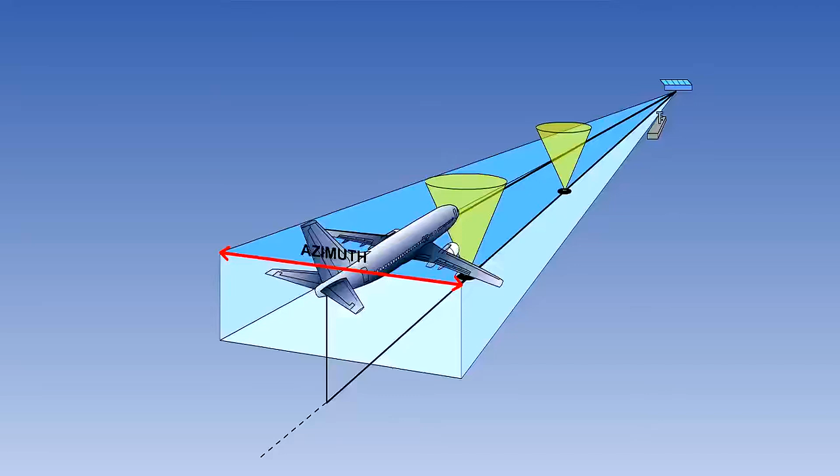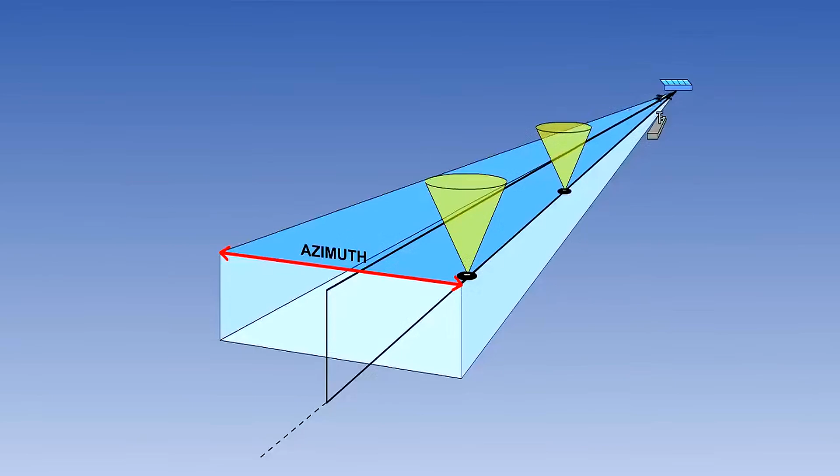The Instrument Landing System, or ILS, has been in existence since the 1960s, but it is still the most accurate approach and landing aid used regularly by airliners. However, GPS systems supplemented by ground equipment called Local Area Augmentation Systems are in advanced stages of research, and no doubt they will be available generally within 10 years.

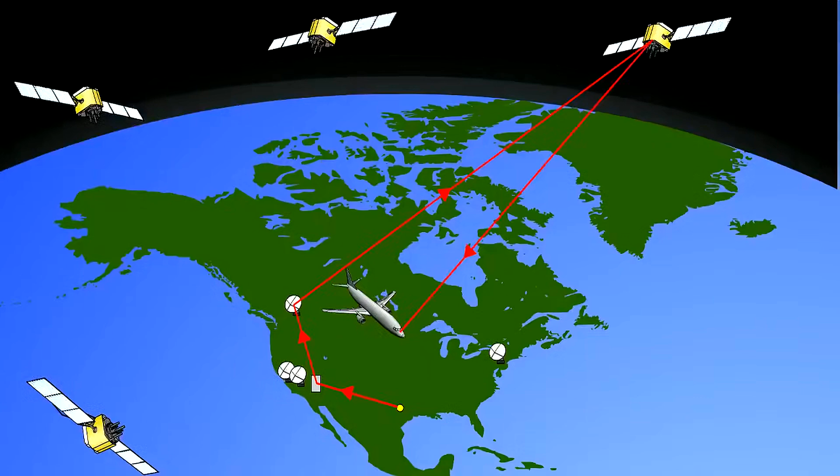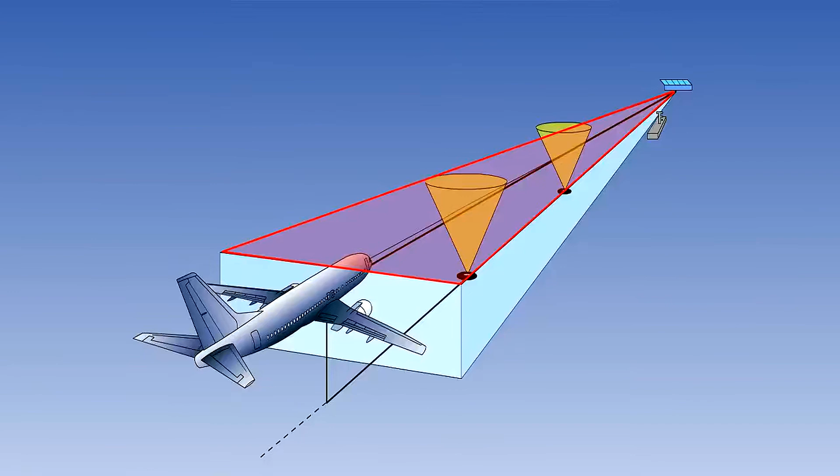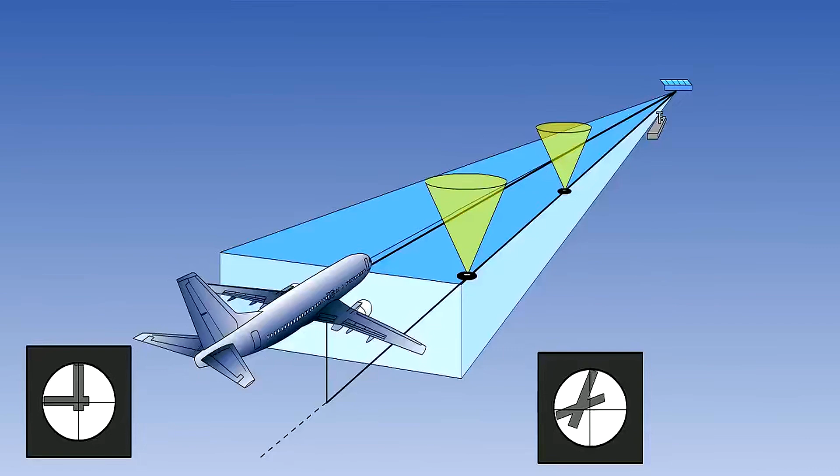In addition, microwave landing systems avoid many of the problems with ILS. But our concern in this lesson is the ILS, which provides pilots with an accurate means of carrying out a precision instrument approach to a runway, giving guidance both in the horizontal plane, azimuth, and in the vertical plane, the glide slope. The ILS provides the pilot with visual instructions in the cockpit to enable him to fly the aircraft down a predetermined glide slope and extended runway centerline, the localizer, to his decision height or decision altitude.

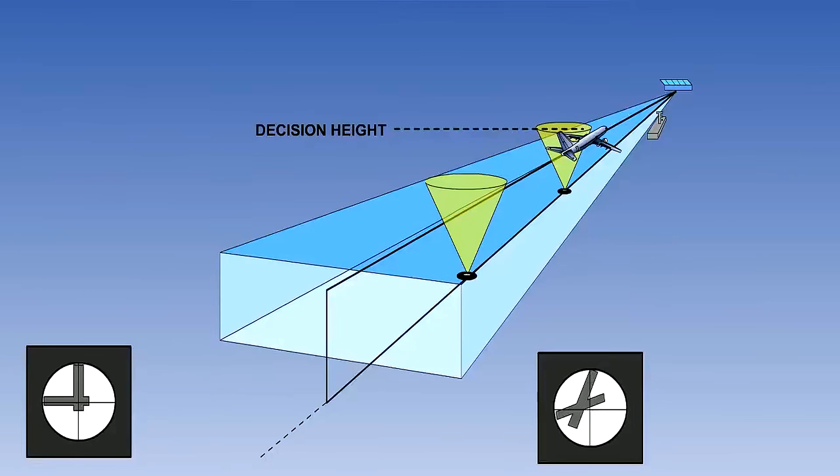At decision height or decision altitude, the pilot decides to land if he has the required visual references. If he does not, he goes around or overshoots and follows the published missed approach procedure.

There are 3 parts to the ground installation, the first of which is the localizer antenna. This transmits in the VHF band and is located on the extended centerline of the runway at the upwind end. That signal provides the extended centerline, the localizer, to the approach side of the runway.

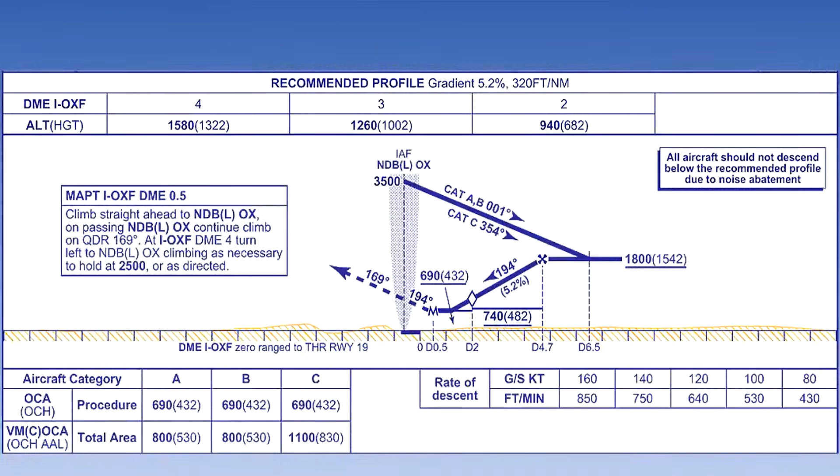The second part is the glide slope antenna, which transmits in the UHF range and is frequency paired with the localizer. It is located about 300 meters in from the threshold and about 120 meters from the runway edge, the touchdown point. It consists of 2 rectangular transmitters on a mast. It provides a descent plane at a predetermined angle to the horizontal, normally 3 degrees according to ICAO. When combined with the localizer, this provides a precise path to fly to the touchdown point.

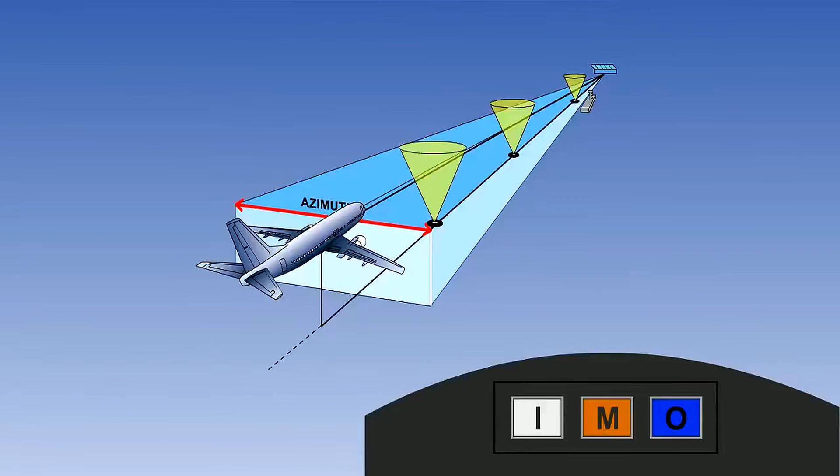The third element of the ILS is a series of 2 or 3 marker beacons on the approach side of the runway. They are designed to give the pilot a cross-check of height against range as he crosses over them during his approach. The distance is shown on the approach plate. Each beacon triggers a different colored light and audio signal in the cockpit as the aircraft passes over.

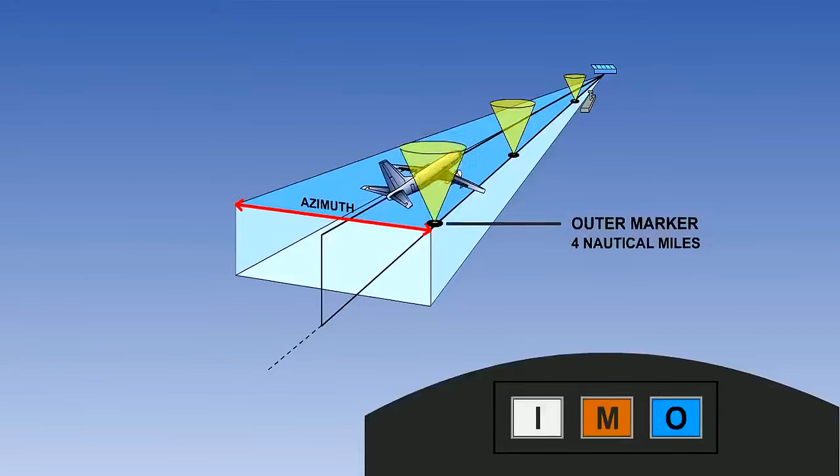The outer marker light is blue with 2 dashes per second and denotes a distance of between 11.1 to 6.5 kilometers from the touchdown point. The middle marker is amber, with alternate dots and dashes at the rate of 3 characters a second, and denotes a distance of about 1,050 meters. The inner marker is white, with 6 dots a second, and denotes between 450 and 75 meters.

Here we see the complete picture.

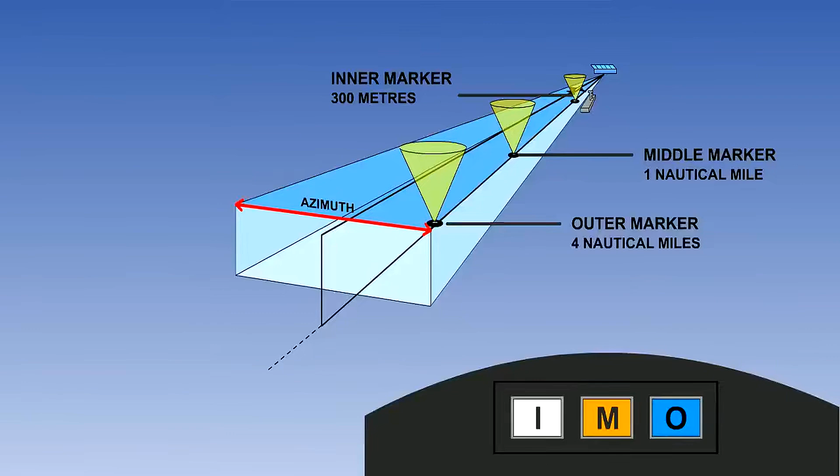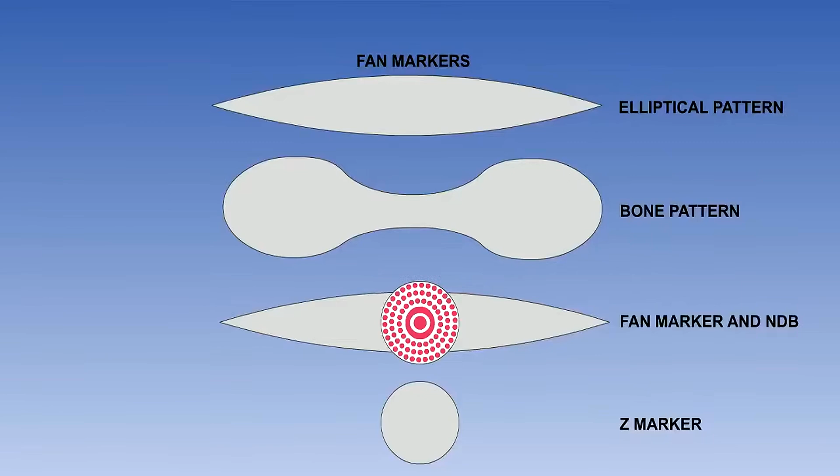Different patterns of transmission are emitted by the markers, but the pilot cannot tell the difference. They are not directional aids in any way and transmit at 75 MHz. They are generated by 400 Hz in the outer marker, 1300 Hz by the middle marker, and 3000 Hz by the inner marker. These beacons have frequently been replaced by distance measuring equipment, DME, which provides continuing distance readout for the pilot.

However, the DME is protected from interference only within the localizer's service area of 25 miles and up to 25,000 feet. When DME equipment is available, it is frequency paired with the localizer, with the DME distance being 0 reference to the threshold.

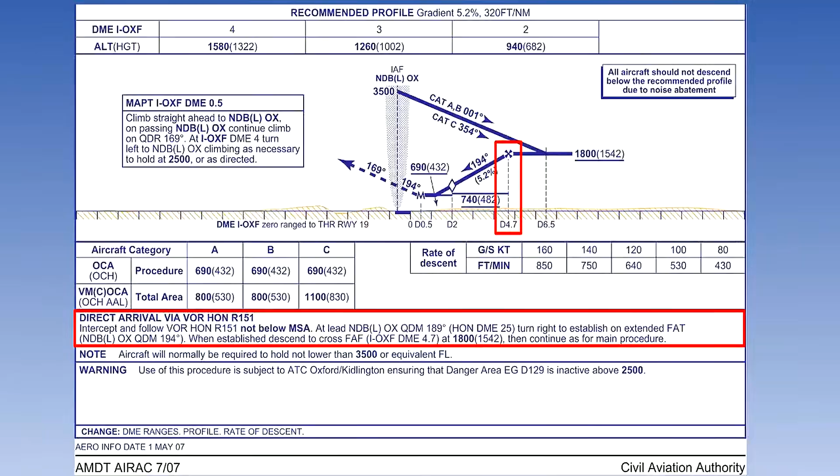It is also used as part of the published departure and arrival procedures, SIDs and STARs, to specify where a maneuver, such as a descent, is to start. The localizer operates in the VHF band, between 108.1 and

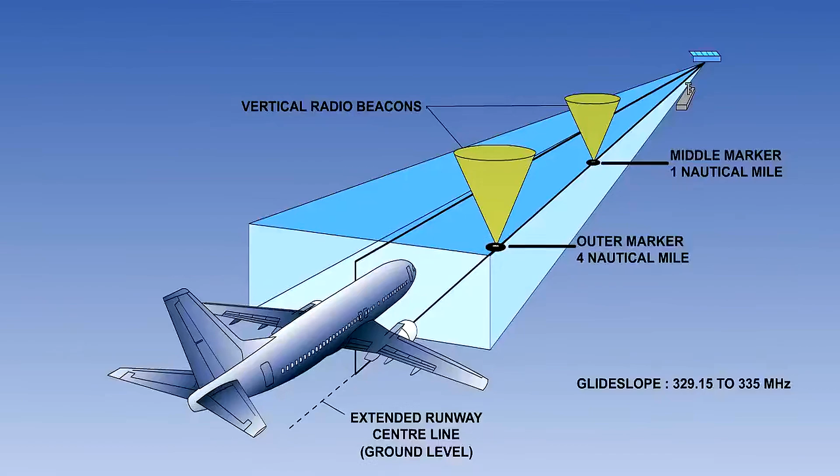Glide slope frequencies are in the UHF band between 329.15 and 335 MHz, also providing 40 channels which are paired with the localizer. This means that the pilot only has to tune to the localizer frequency to also get the glide slope transmission. This saves work and avoids errors. The DME transmission is also frequency paired with the localizer.

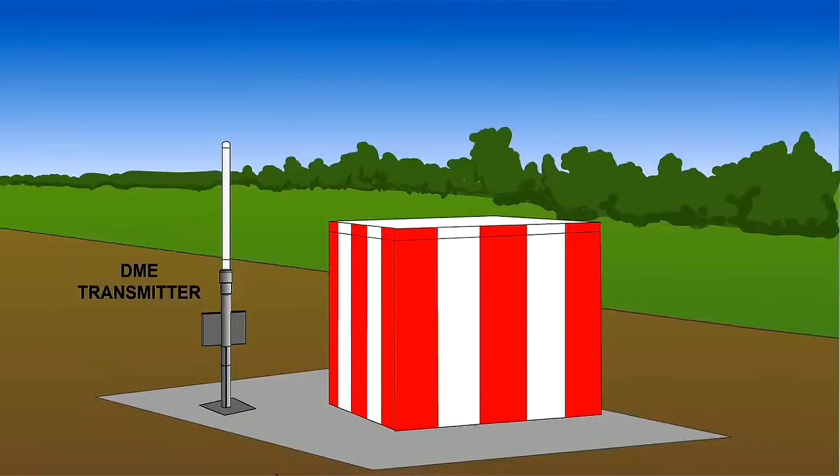The ILS must be identified before use. The ident on the localizer transmission is a 2 or 3-letter group, transmitted at 7 groups a minute, prefixed by the letter I, such as IOXF for Oxford ILS.

Airfields with an ILS are shown on charts and plates with a long paper dart-shaped symbol, and the frequency is shown. Here we see Oxford ILS on 108.35 MHz.

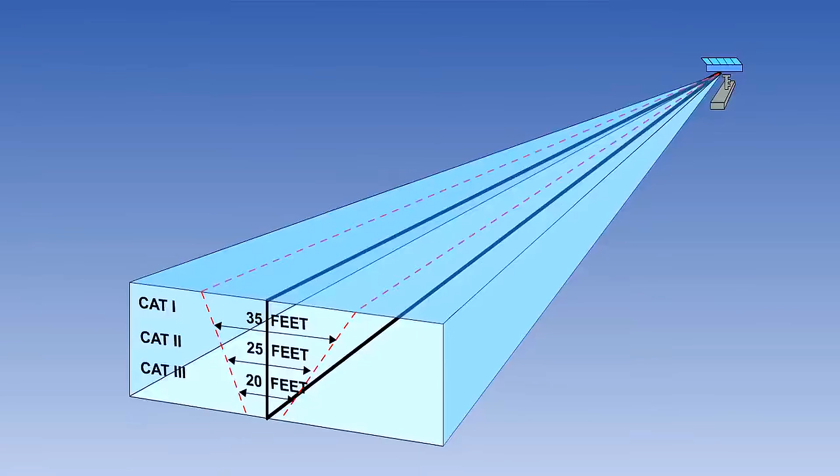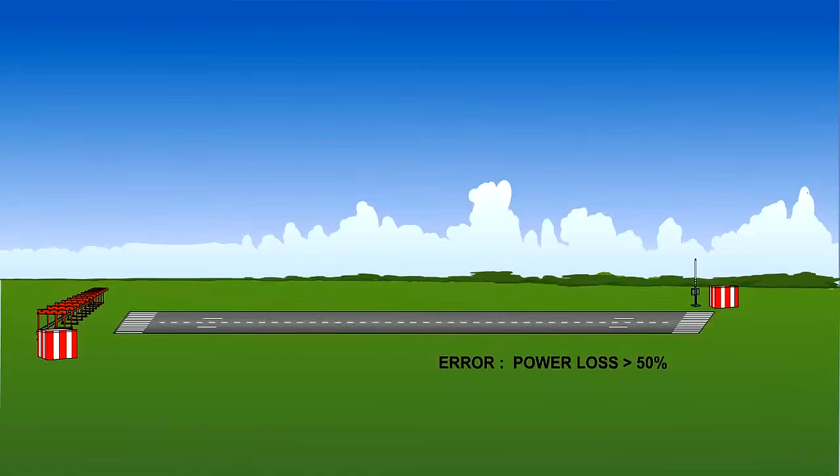If the ILS becomes unserviceable, the ident is withdrawn. If it is undergoing maintenance or testing, the ident will be withdrawn or replaced by a continuous tone.

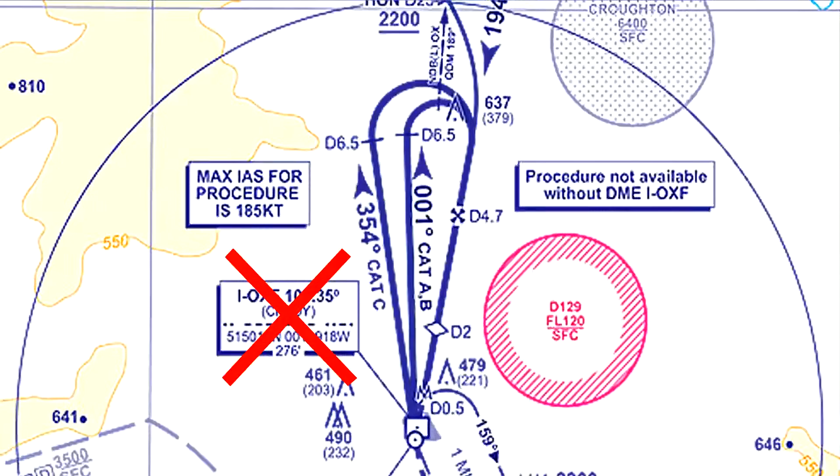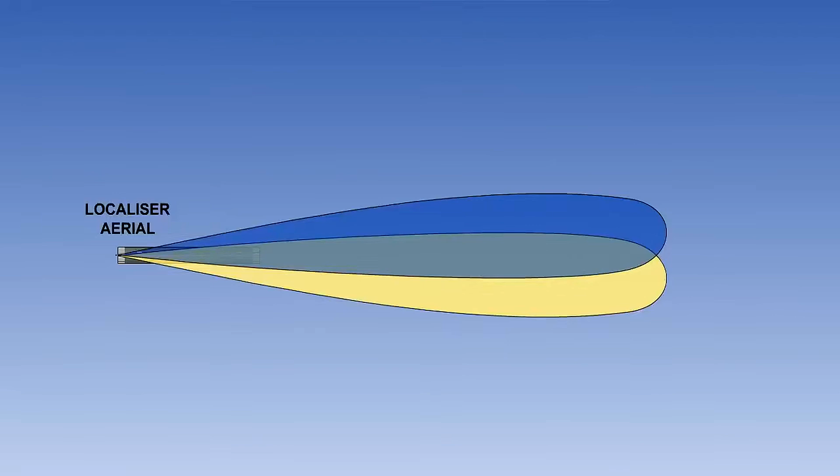The localizer antenna radiates 2 overlapping lobes along the runway approach. The lobes are transmitted with horizontal polarity on a single VHF frequency. When viewed by an approaching pilot, the right-hand lobe, the center of which is directed to the right of the runway center line, is modulated at 150 Hz. The left-hand lobe is modulated at 90 Hz.

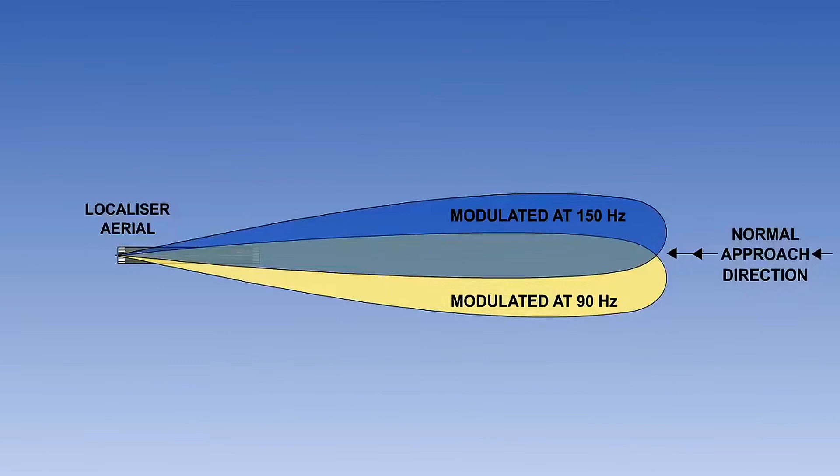Where the 2 lobes overlap is the extended center line of the runway. The depth of modulation increases away from the center line, that is, the amplitude of the modulating signal increases away from the center line. The difference between the depths of modulation of the 2 signals, DDM, is expressed as a percentage, found by subtracting the percentage modulation depth of the smaller signal from that of the larger.

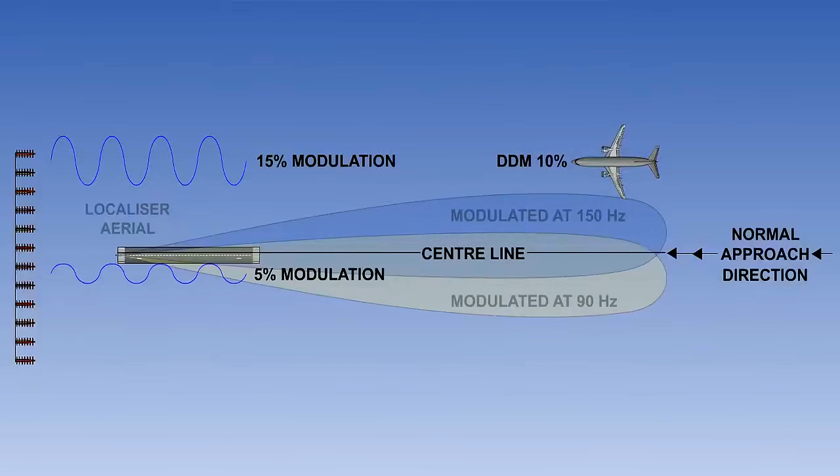For example, the carrier wave is modulated by 15% by the right-hand signal and by 5% by the left-hand signal. The difference is 10% to the right, which equates to the angular displacement of the aircraft from the center line.

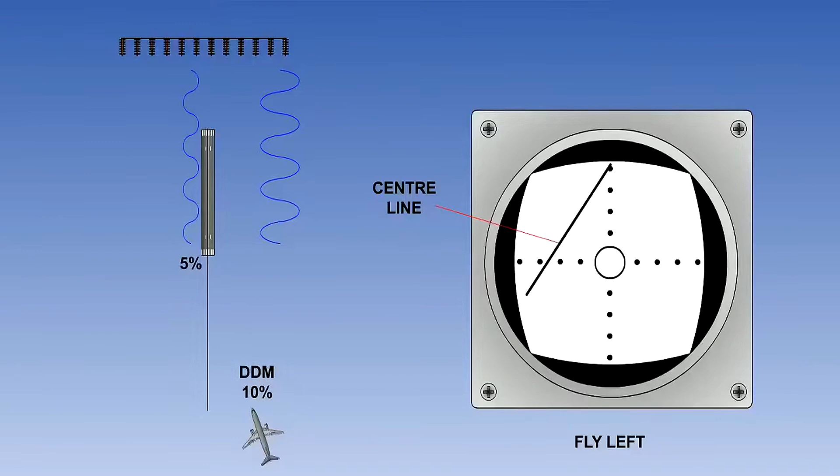This difference in the depth of modulation causes a difference in the electrical signal received by the aircraft. This is represented by a deflection of the ILS needle in the CDI in the opposite direction. As the needle represents the center of the runway, a deflection to the left tells the pilot which way to fly. It is a command instrument.

If the DDM is 0, with both signals having equal strength, the aircraft is on the center line. Remember that the CDI 5-dot display is very sensitive.

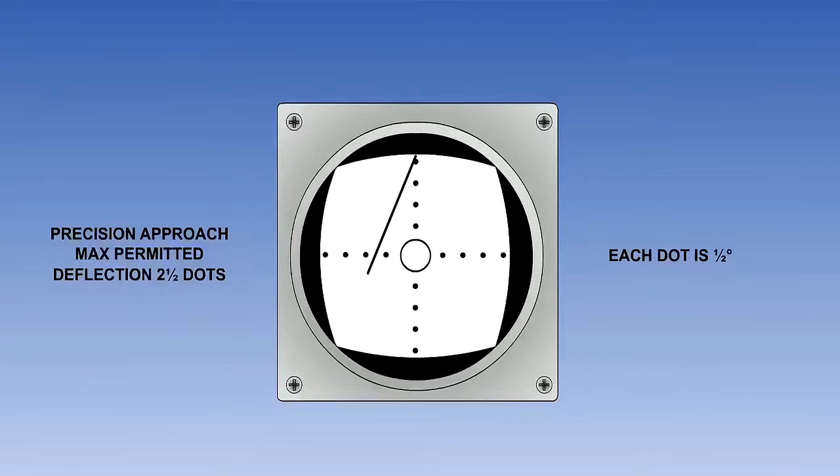Each dot, including the inner circle, represents 0.5 degrees, so total deflection is only 2.5 degrees. The ICAO standard for being considered established, that is, within an acceptable margin of error, is half of this, 1.25 degrees. The descent on the ILS cannot be commenced until established.

Warning flags will appear on the CDI in the absence of the carrier frequency, in the absence of either or both modulations, or if the percentage modulation of either signal is 0.

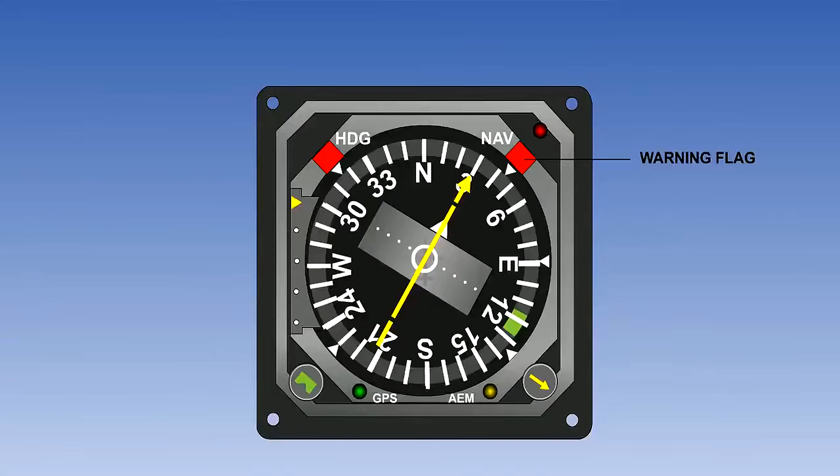The two lobes transmitted by the localizer antenna cover a far wider path than the 2.5 degrees of the ILS display in the cockpit. In fact, they provide coverage from the center of the localizer antenna to a distance of 25 nautical miles within plus or minus 10 degrees of the equisignal, the center line. They also provide coverage to a distance of 17 nautical miles between 10 degrees and 35 degrees from the center line.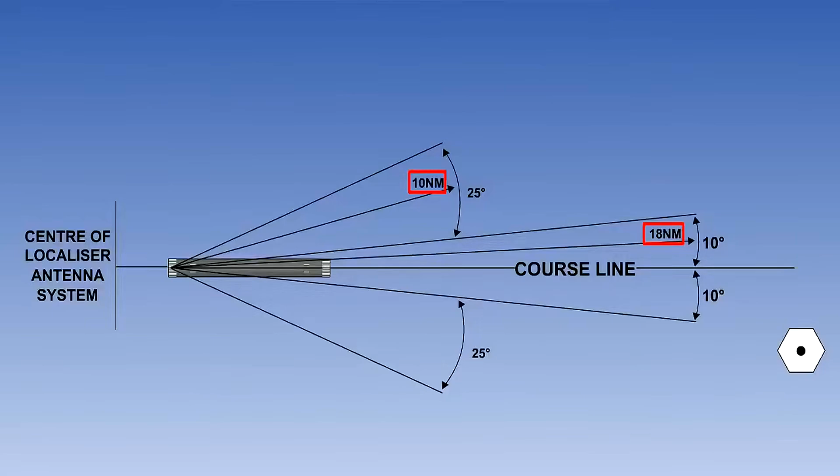These figures of 25 and 17 nautical miles can be reduced to 18 and 10 respectively when other navigation facilities, such as a VOR, provide satisfactory coverage within the intermediate approach area. The distances are also reduced to the same lower figures where the glide slope is steep, namely 4 degrees or more, as in London City Airport.

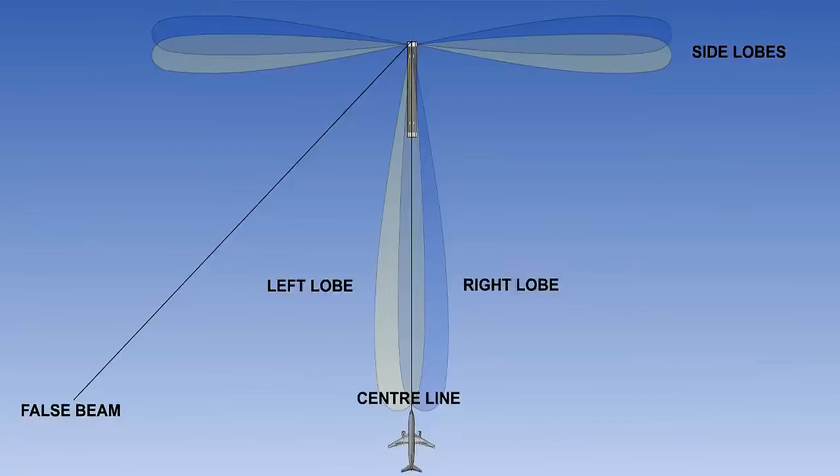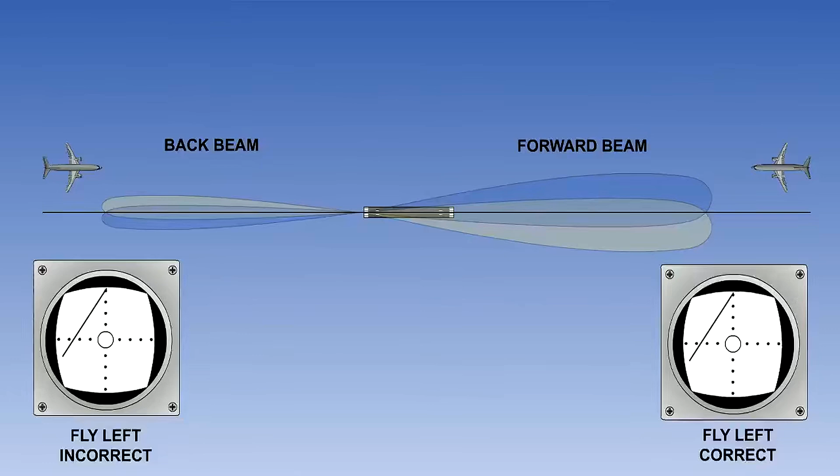Outside of these areas, false beams may be experienced as a result of the radiation of side lobes. The localizer will transmit signals in the reverse direction, back beams, but it is not permitted in the UK to use these in any way, as all the indications are reversed. However, in some countries, it is permitted to use this back beam as a non-precision approach.

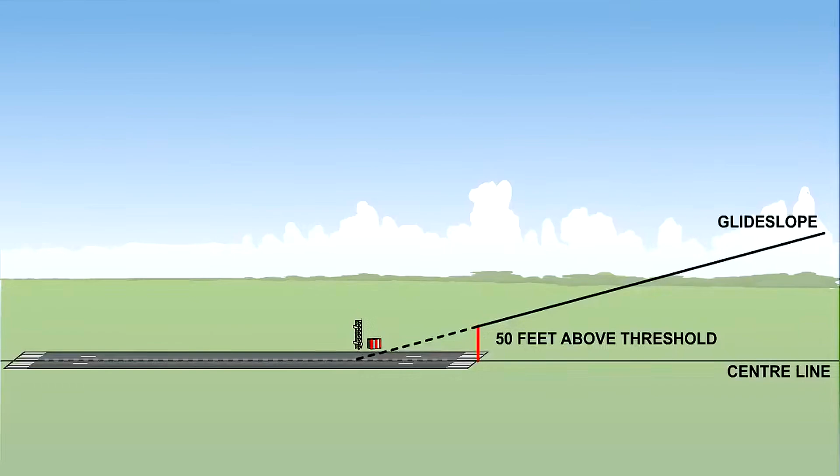There are two glide slope antennae, both mounted on a mast approximately 10 meters tall, positioned some 120 meters from the runway center line and some 300 meters upwind of the threshold markings abeam the landing point. The ILS reference datum point is a point at a specified height, usually 50 feet, located vertically above the intersection of the runway center line and threshold, through which the downward extended portion of the ILS glide slope extends. Remember this when you are asked to do height calculations to the touchdown point, which is 50 feet lower.

The same principle of radio wave propagation is used as for the localizer, but a UHF carrier wave is used, and the lobes overlap one above the other rather than side by side as in the localizer. The upper lobe has a 90 Hz modulation and the bottom lobe has a 150 Hz modulation.

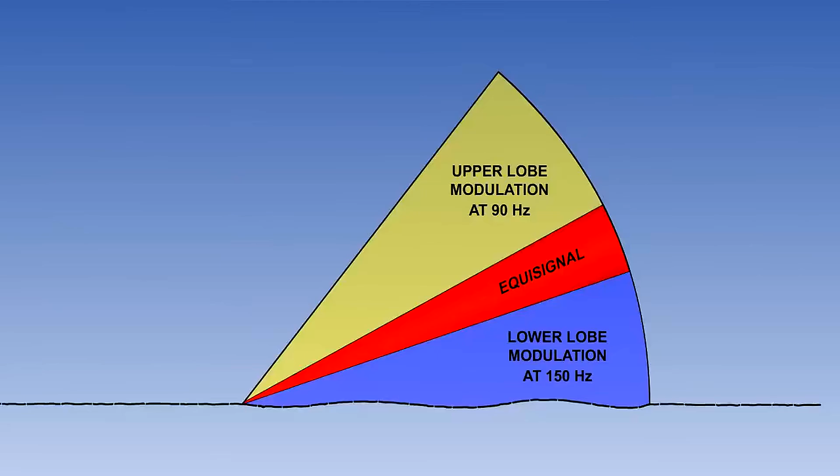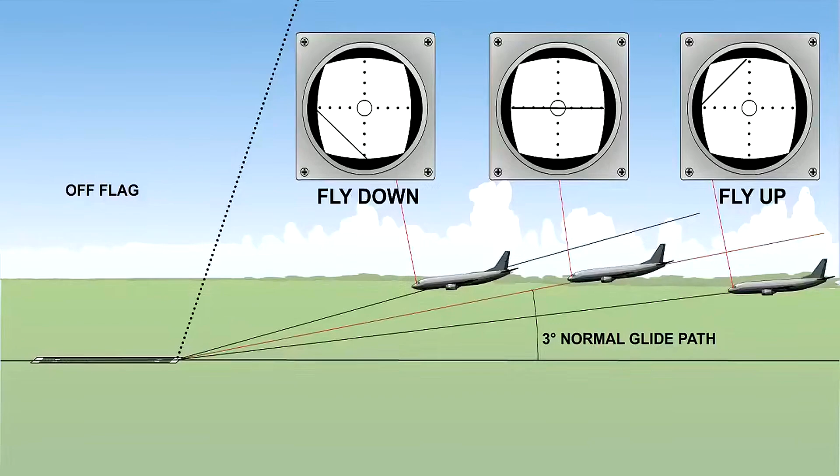The ICAO standard glide path is 3 degrees, indicated where the difference in depth of modulation of the overlapping lobes is 0. The 0 DDM is indicated on the CDI by a needle centered on the horizontal crossbar. If the aircraft is too high, the needle representing the glide slope will be below the horizontal, and if the aircraft is too low, the needle will be above the horizontal.

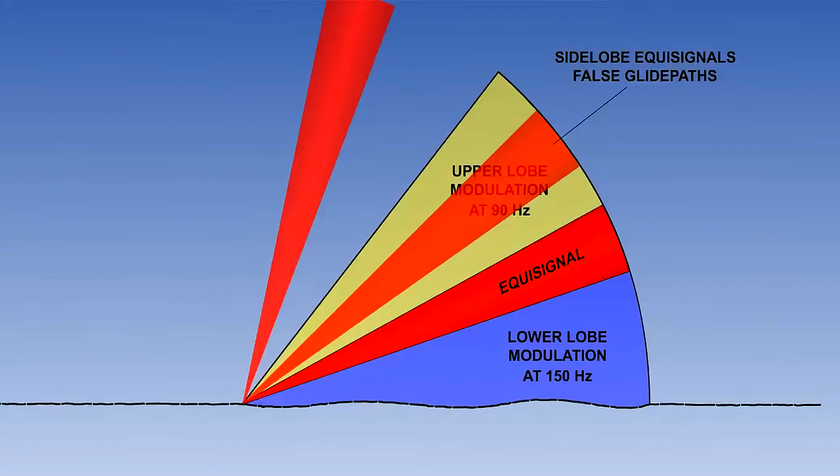False glide slopes can exist because the lower lobe lies adjacent to the surface and creates ground-reflected waves. Fortunately, the false glide slopes are all above the true glide slope at multiples of 3 degrees.

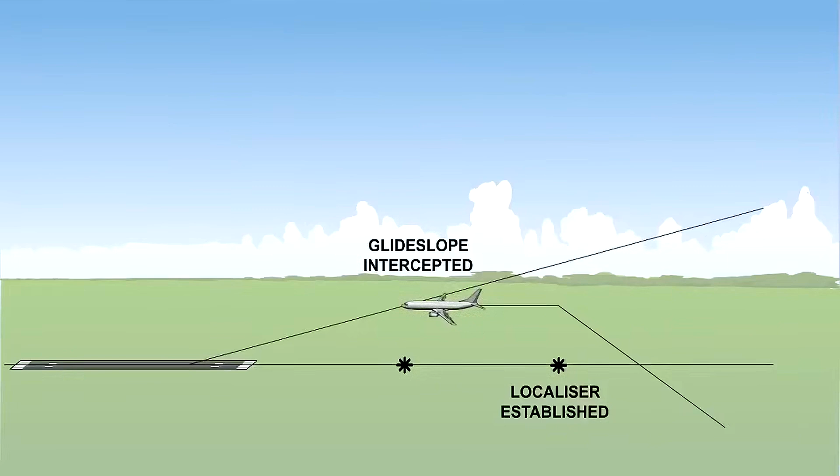The normal practice for intercepting a glide slope is to do so from below. If, during the intercept, a pilot were to see an indication on the CDI that the glide slope was below, he should suspect a false glide slope. Some airports, such as Heathrow, use a continuous descent approach, which allows a glide slope intercept from above.

A 3-degree glide slope increases in height at the rate of 319 feet per nautical mile, although we normally approximate this to 300. So at 5 miles out, the glide slope should be at 1,500 feet, and at 10 miles out, at approximately 3,000 feet. Check your height with the DME or the final approach fix beacon and check your QNH.

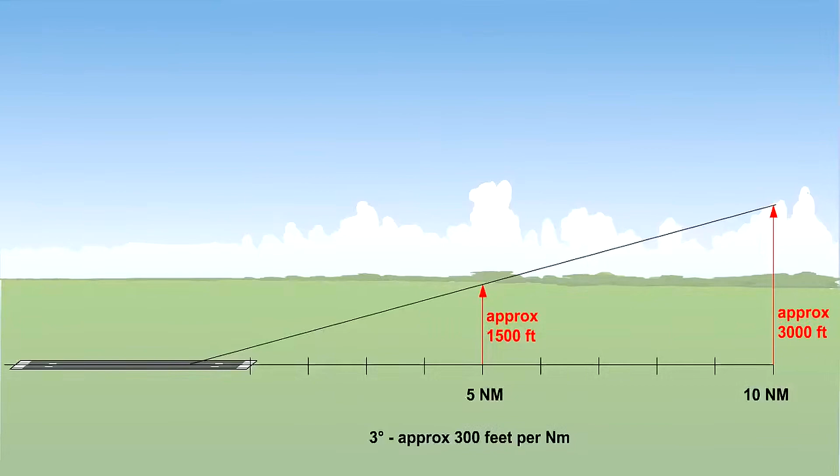There is another glide path indicator usable in VMC, namely the PAPIs, that is, precision approach path indicators, which can be used to check the height. These are set to the same glide slope angle and reveal two white and two red lights when the aircraft is exactly on the glide slope.

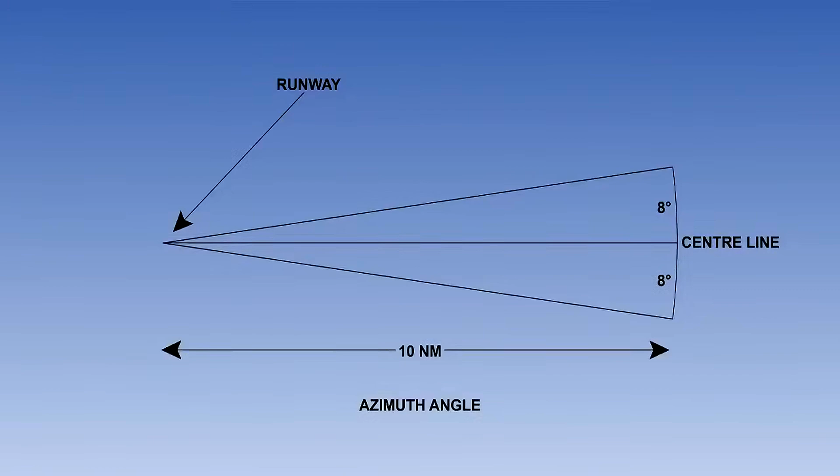The glide slope coverage extends from the transmitter to a distance of at least 10 nautical miles, in sectors of 8 degrees in azimuth either side of the center line. It is 8 miles for steep glide slopes. Glide slope vertical coverage is required from 0.45 times the glide slope below it, to 1.75 times the glide slope above it.

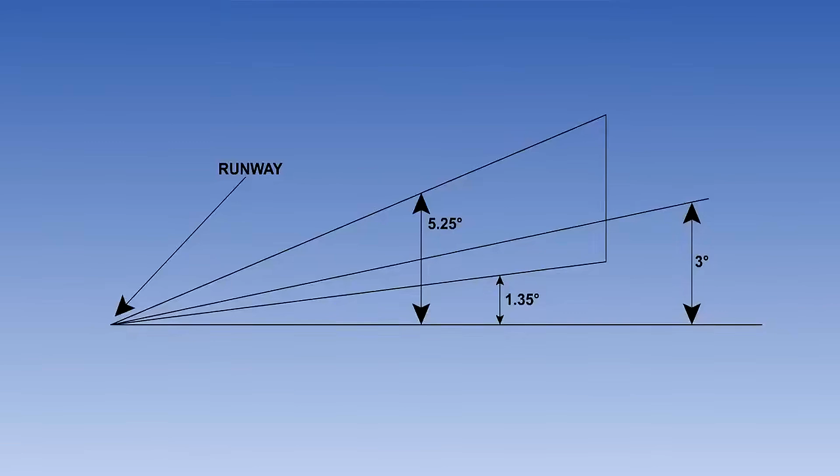If we apply these figures to a 3-degree glide slope, we see that the vertical coverage is provided through an arc from 1.35 degrees above the horizontal to 5.25 degrees above the horizontal. This equates to no more than 1.65 degrees below the glide slope and 2.25 degrees above the glide slope. So accurate flying is required.

The glide slope indicator is even more sensitive than the localizer, at 0.14 degrees per dot, so a full-scale deflection is only 0.7 of a degree. Note that maximum safe deviation below the glide slope is half full-scale deflection, or 2.5 dots, a mere third of 1 degree.

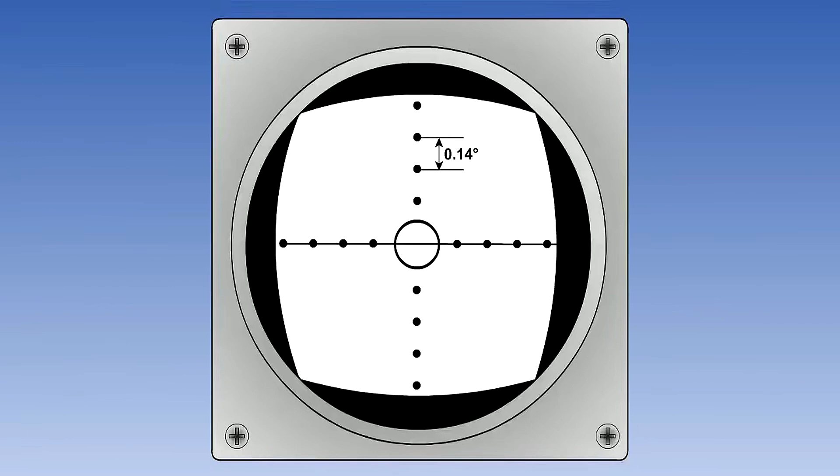In this lesson, we have looked at the components of the ILS system, the frequencies used, the radiation pattern, and coverage of the localizer and glide slope antennae.